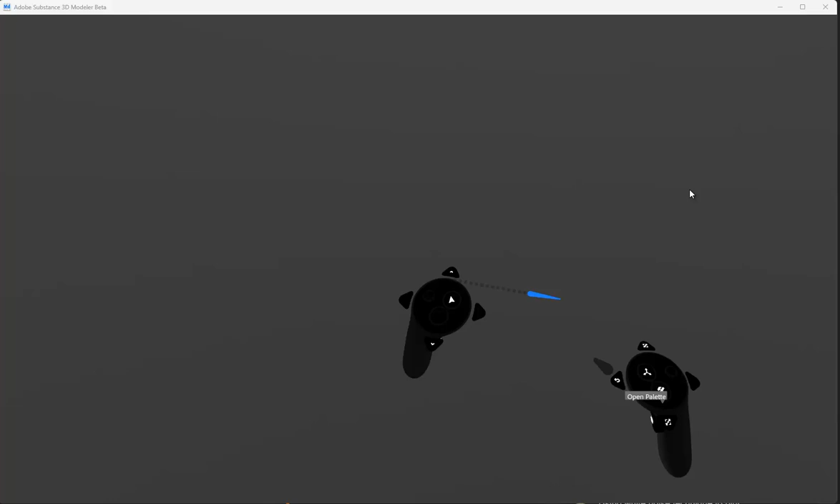So in the last video with the joystick, I went over the very basics. You can watch that to see the basics of how these live blend prims work. So I'm going to start with a cylinder.

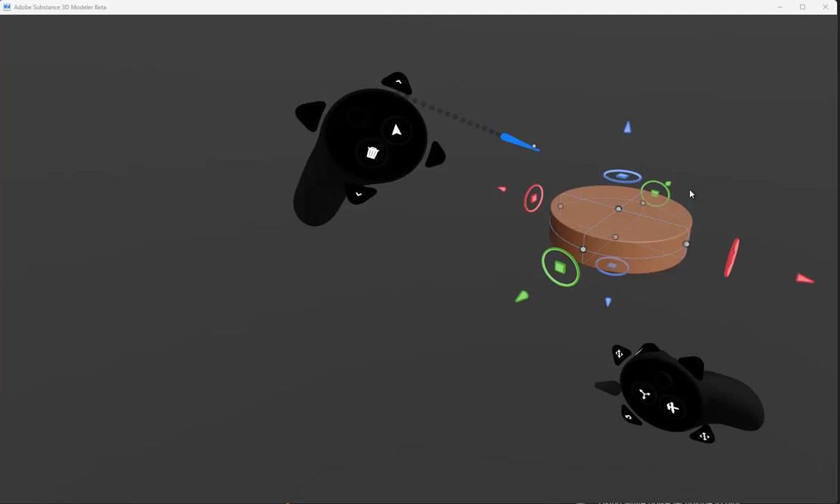Use the gizmo, and these maybe go up a level. These videos, I suppose, are for people that might be familiar with Modeler, but all these SDF tools are the live blend primitives rather than the clay layers. It's fairly new, still in beta, with a lot of features to be added, and there's a few bugs here and there.

So I'll add a bit of a taper, flip that around, and give it a little bit of fillet. As we said in the last video, all of this stuff is fully non-destructive, so you can change the shape and change all these parameters at any time, over the regular clay layers where you lose all ability to change your parameters once you lay down the clay from the preview.

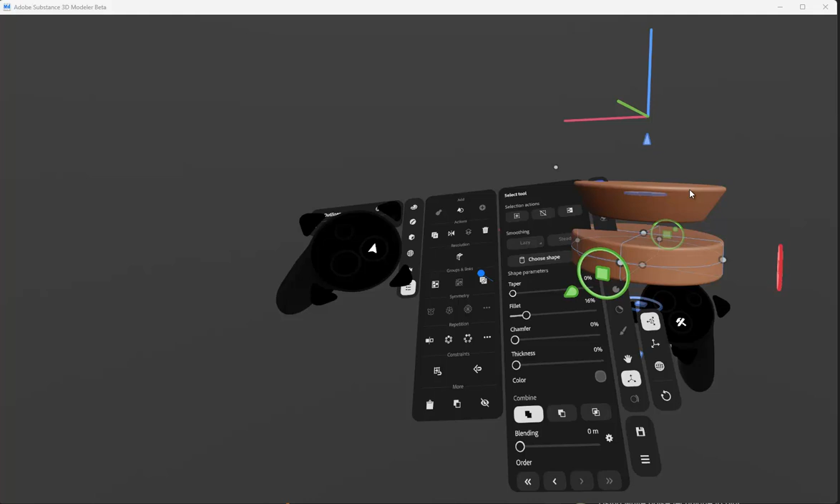So I'm going to just clone that. As I said in the last video, I'm just holding down the secondary trigger and grabbing the gizmo, and that's going to clone. And I'm doing this, cloning it within the same container here, rather than creating another one from here.

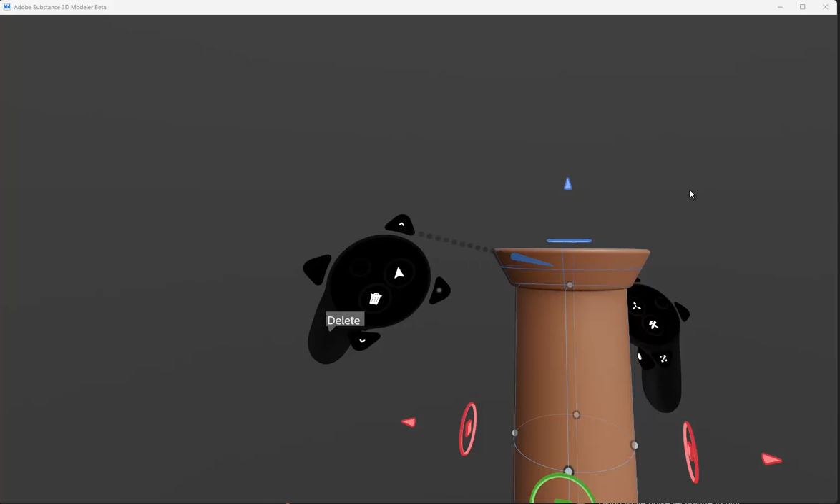If you're working within the same container, you can just keep cloning them, and because it's not destructive, you can change the shape and parameters instead of creating new ones all the time. Just clone it and change your parameters.

So I might add some blend onto that. Maybe a bit more taper, just to give it a curve in, sort of. Maybe a bit more blend. Try and smooth it out there just by moving the top up.

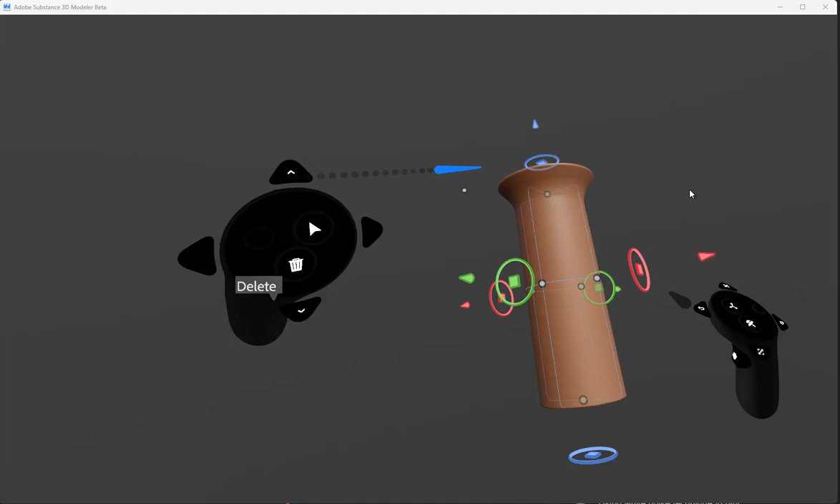And I'm going to clone this again. Actually, no, I'm not going to scale it down, so I'll just clone it and bring this up, add another taper. Maybe stretch it out a bit. Let that blend.

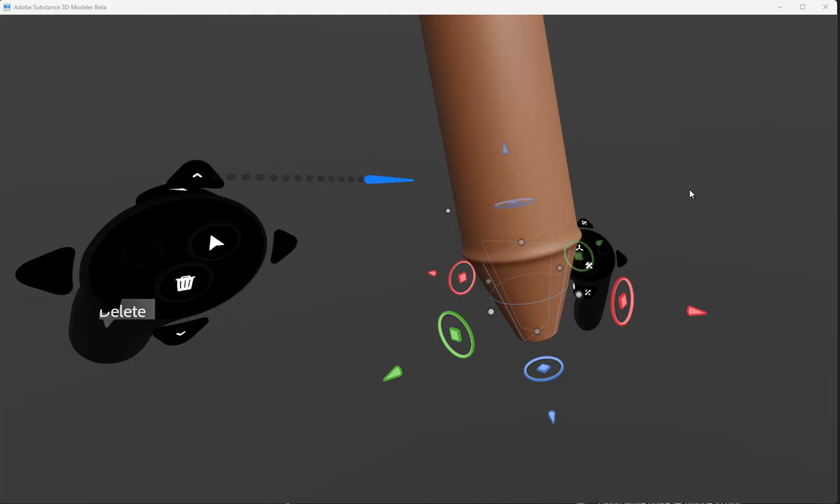And depending on the sort of design you're doing, that might look good there if you want to leave that, or just take the blending down. And then once you convert that across, I think this is an issue with these live blends in all programs that do this kind of live blending with SDFs.

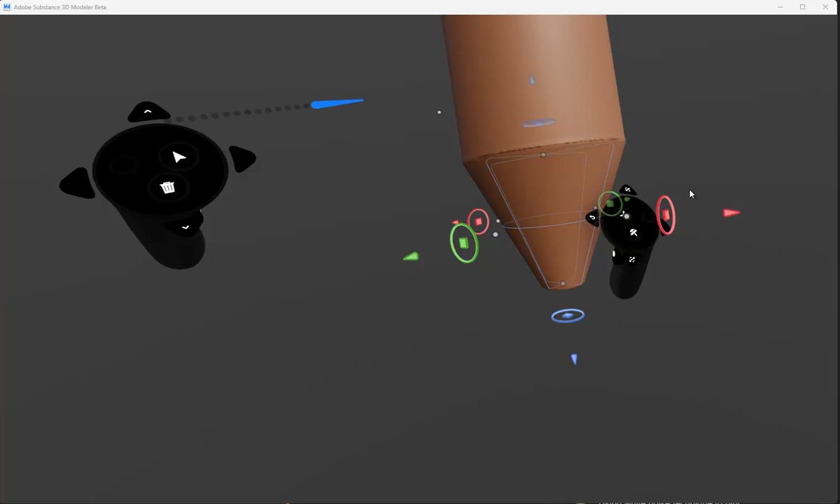When you have two flush surfaces like that, the blend leaves a bulge. It's not just in Modeler, but you can always smooth this out and minimize it. Once you convert that layer to regular clay, it'll all merge together, and then you can smooth it out. So I'll do that again, clone that, and get rid of the taper.

Maybe leave a small bit of a taper on it, a bit more, and take it in. That'll just be the lip, maybe a bit of a taper, yeah. So that's pretty much the basic shape.

I probably actually want to make this bigger, and bring the taper in a bit more, just to get that blend back there. That looks a bit better.

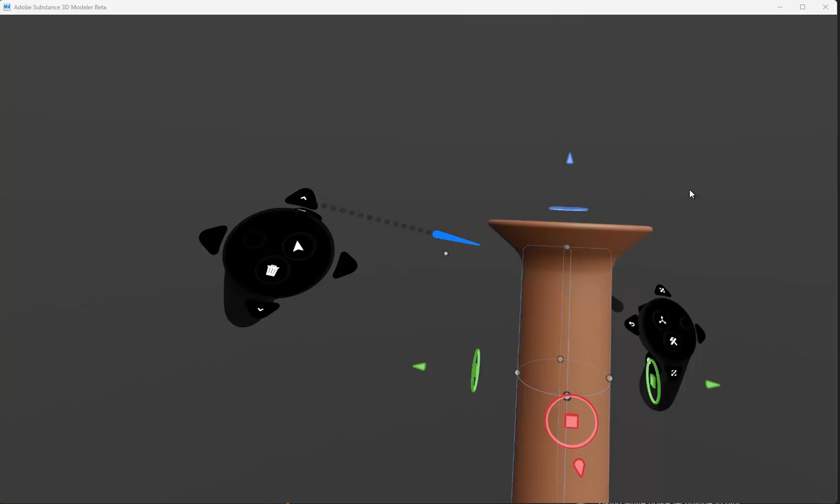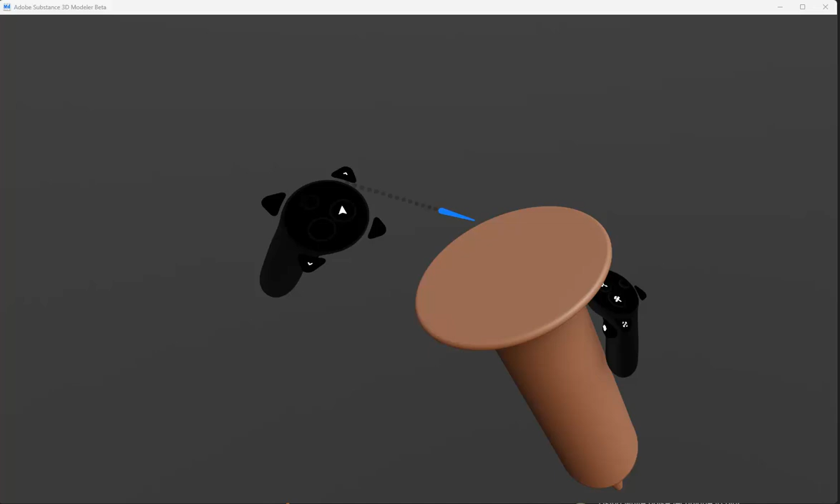So next I'm going to create the inset here for where the screwdriver sits into the top of the screw head, and I'll be using the compound Boolean operand, which means I'm going to be grouping them together within the container. That means it'll be a compound operand, so I can blend them and then subtract from this without the blend affecting this. So if I didn't group them and create a compound and use the blend, you'll see here in a minute.

And then just straight subtracted them as layers within this container that weren't grouped, the blend would affect this as well, which I don't want to happen. So I'm inside this, and I'm just going to create a new layer, or we can do the same thing and turn this into a cube.

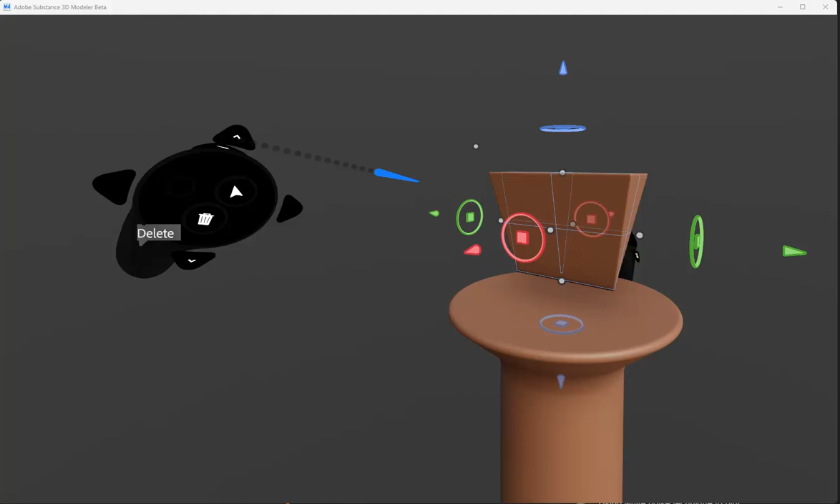And use taper. Let's see how that's going to work. I want to make sure it doesn't - you can see the outline of it here. So I want to make sure - see here, it's coming through the surface. So that means it would leave a hole there.

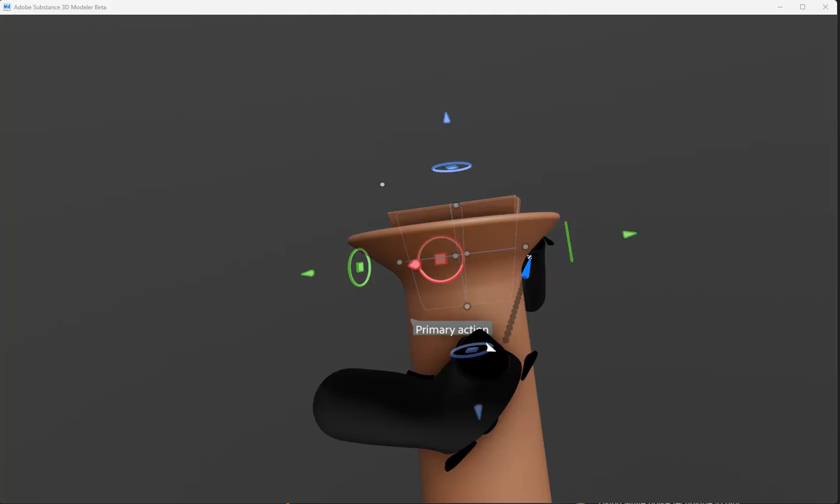So I could make this wider, make this more steep, or just make this narrower here. And if I turn that into a subtract, we can stretch it out there, and then it's hitting it there. So I'll just bring it slightly in, and bring this back up, turn it back into a union for the moment.

And now I'm just going to hold down the trigger and rotate clone, and then press the top button on the secondary controller just to snap that. And now you'll see when I use the blend on this, it's going to give me that curve at the side that I want.

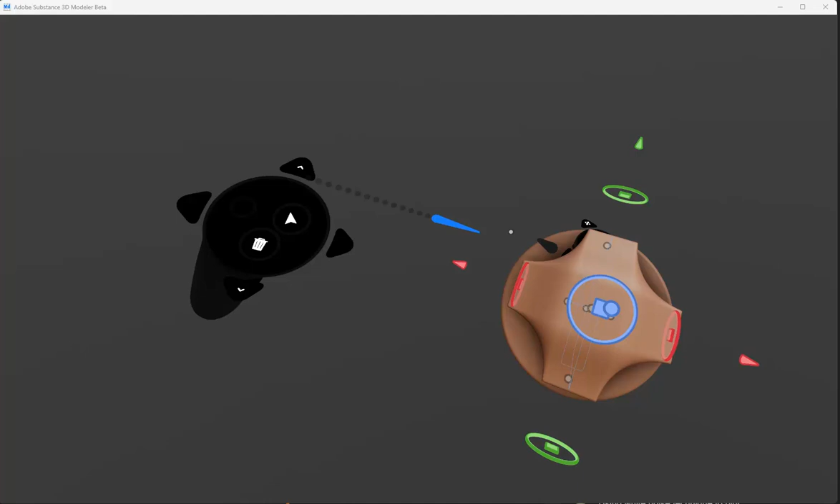Whereas if I did that without grouping these together, it would affect this as well, which I don't want. So I'm going to select the two of them and create that group.

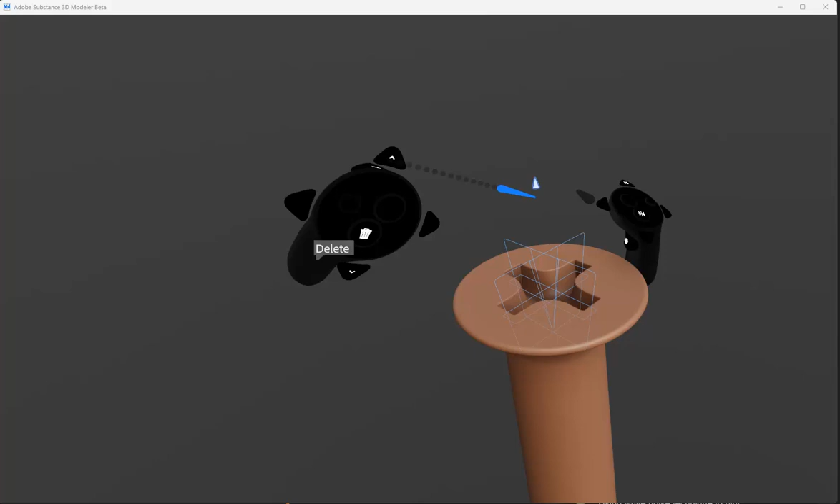And turn it into a subtract. Now we can get that effect without the blend affecting this. One other thing I want to do is make that deeper.

So that wouldn't - if you've ever used a screw with a bad head, the cheap screws with a bad head, this is the type of thing you're going to get. The screwdriver keeps turning in the screw, wearing out the head.

But anyway, I'm going to go back here before I turn this into a group, because at the moment there's a weird bug with the groups that I don't want to run into. So I'm just going to go back before that.

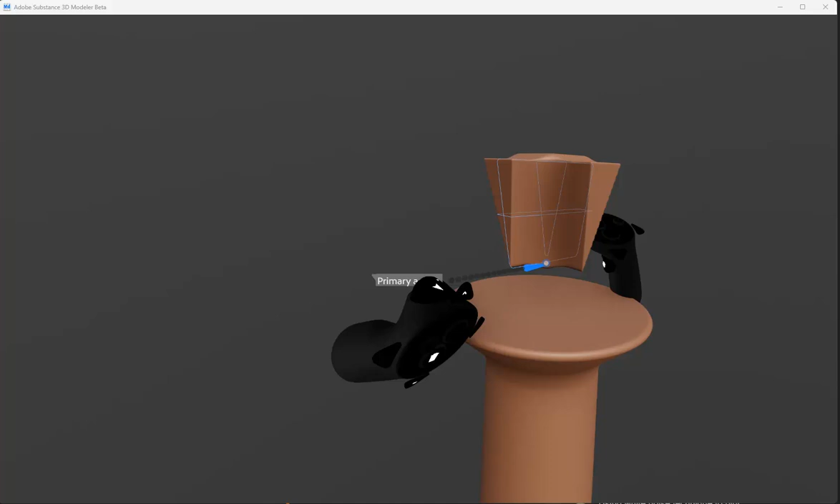And stretch this down, maybe just bring the two of these up, and...

In fact, this is the blending issue I was talking about here, because I haven't grouped these yet. But what I was going to say was, the reason it wasn't going deeper, even though it was into this, was because of the order of operations I mentioned in the last video.

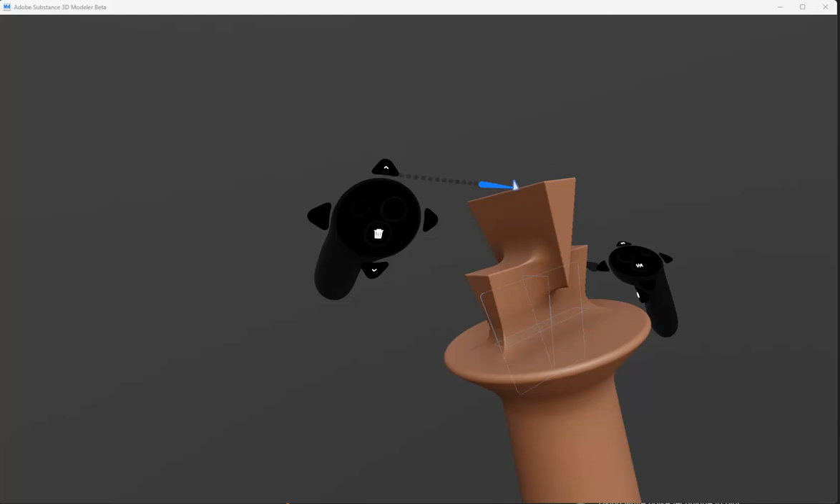So I'm going to go back again. Didn't even need to do that, because that should be enough depth here, goes down into the shaft of it. So what I need to do is take this group, and with the order of operations, I'm going to send it to the top.

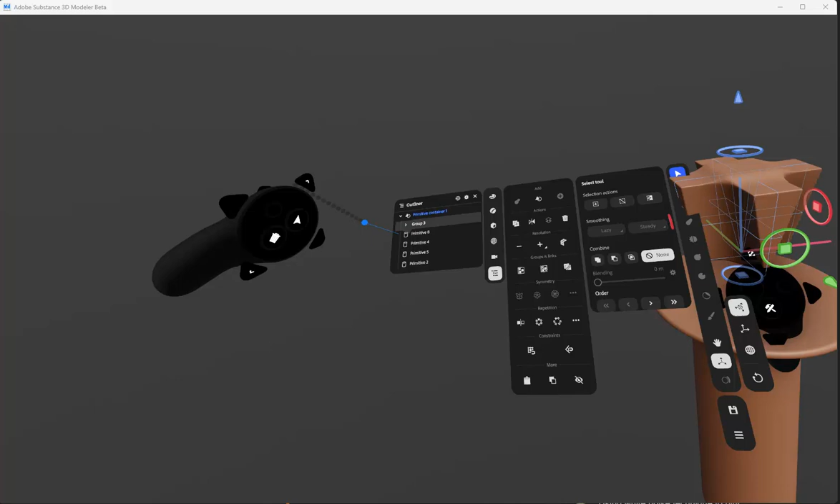So now that it's on the top - sorry, my mistake, I meant the bottom. I want to put it on the very bottom.

I explained the order of operations in the last video, so I can see now that's going down to the shaft a bit more realistically. And then if I wanted to - I'm just barely on the edge there, but I think that'll do anyway.

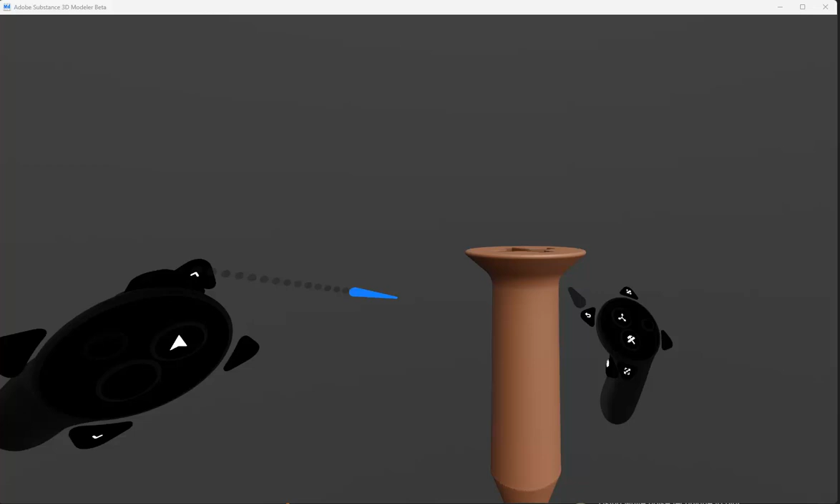And that's how the compound is going to work then, with the group, so that blending effect doesn't happen. So now for the threads - at the moment there's no helix, no parametric helix primitive in Modeler.

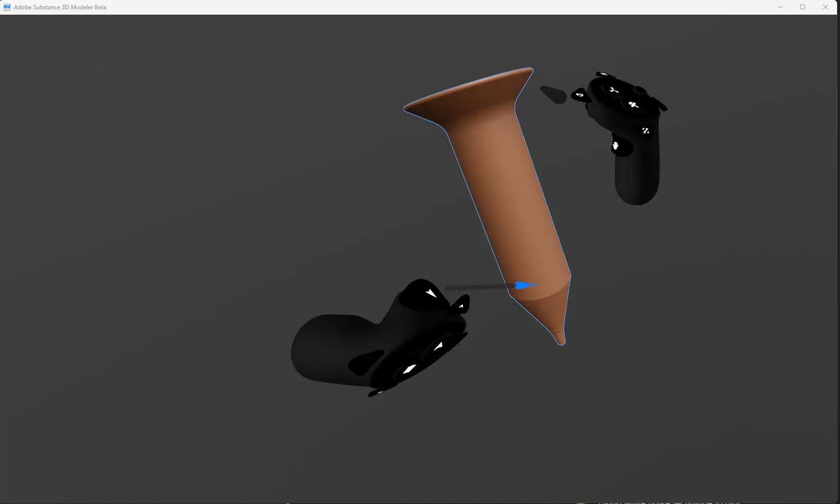So you have to sort of hack this together by hand. This is far from ideal if you're looking to do clean mathematical modeling. I'm going to be hacking this by hand, and I work this way sometimes. It gives you that handmade feel.

And if you're rendering something, it can give you that extra handmade kind of feel when everything's not completely CG perfect. When it's all textured and rendered, it can really add to the realism. But obviously, if you're printing something out, you want it perfect, especially for a screw thread, or for manufacturing.

So the way I'm going to do this, I'll fast forward through it. I'll do it all by hand, but you don't want to watch me do it all by hand. I'll show you what I'm doing, then fast forward through it.

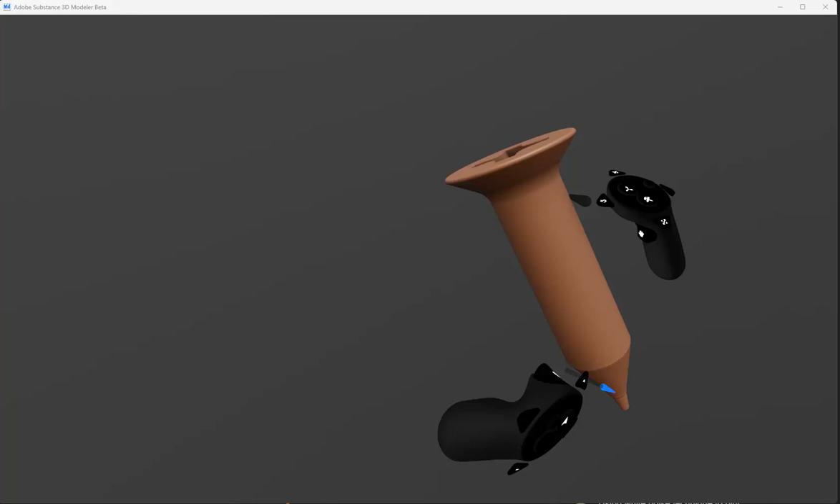Right, so for the thread, I'm going to just use a regular clay here, and this will be your default.

I'll just use the taper, full taper. Take some thickness in, and maybe bring it down a bit. Lay down the clay.

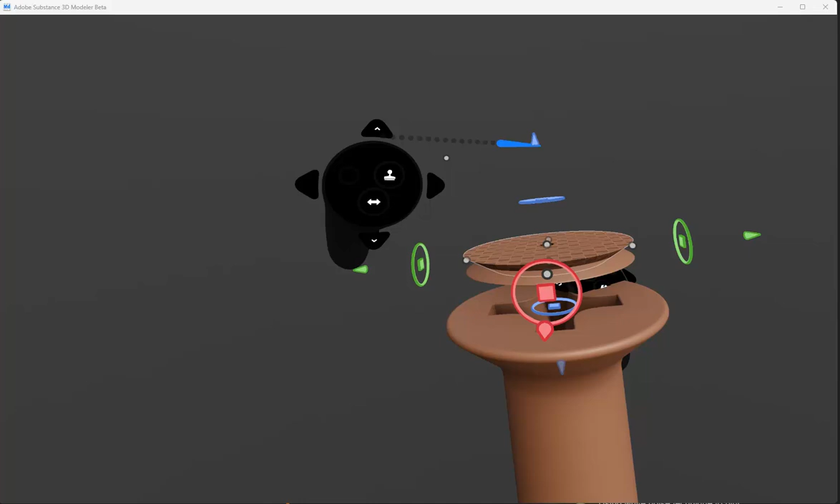And actually, before I do that, I'm going to just put the res up a bit. Lay down the clay, and then just line this up, just to give us that basic sort of thread shape.

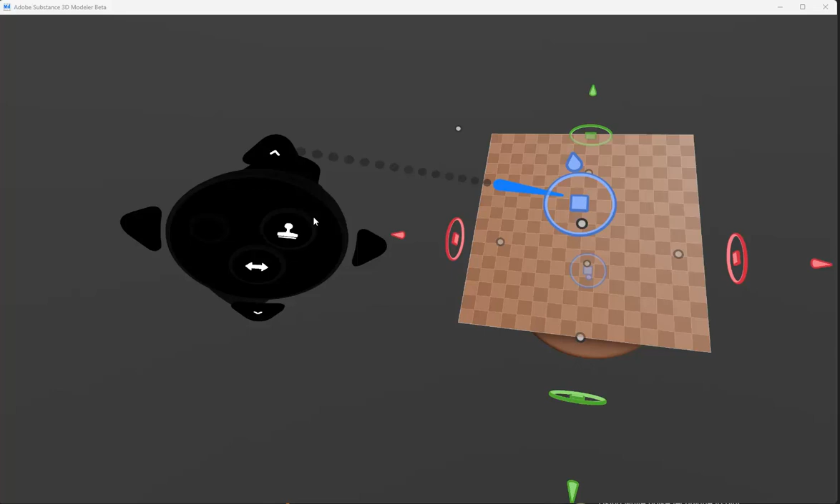Lay that down, and then I'm going to just take a quarter of this, so I can use the - you could use the crop tool here, but I think it's broken in this version, so it would have just deleted all these and left us with a quarter.

So I'll just have to do it the other way here. I'll just get rid of that. Get rid of that. Now this is going to be the section I'll use.

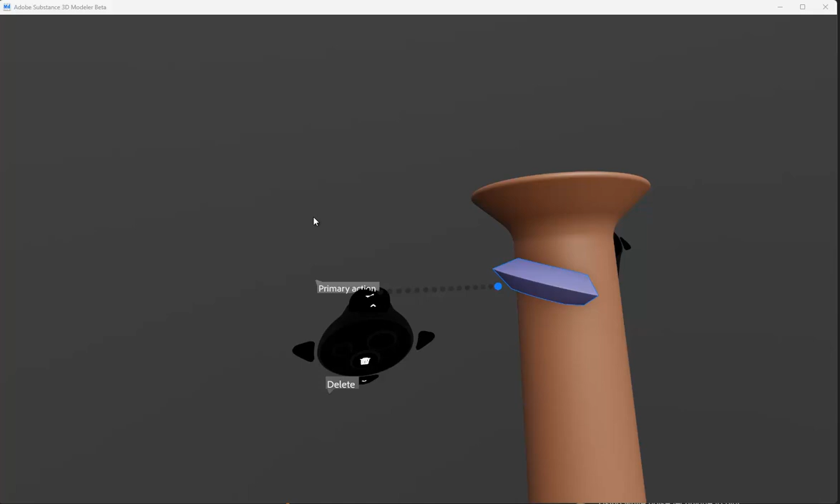Basically I'm just going to go around like this and line this up by hand, which might seem crazy, and it probably is. But as I said, doing handmade stuff like this in Modeler, at least for me, adds to the realism at the very end.

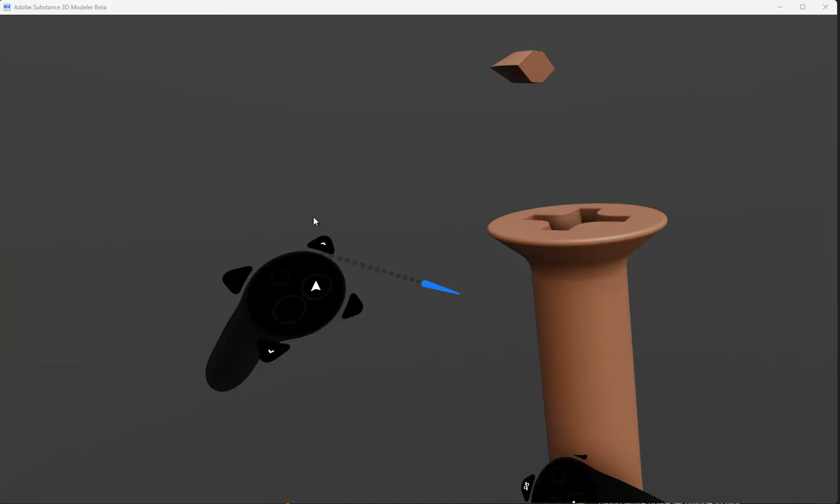When you're rendering to something that's fully textured. So just to help guide with this, because it's going to be very hard to try and get those compound angles on a spiral all the way down by hand and by eye.

So one way you can do that is to just make a guide here, and it is in the stamps. Maybe no, nothing there, and here there is a helix, this mesh spring.

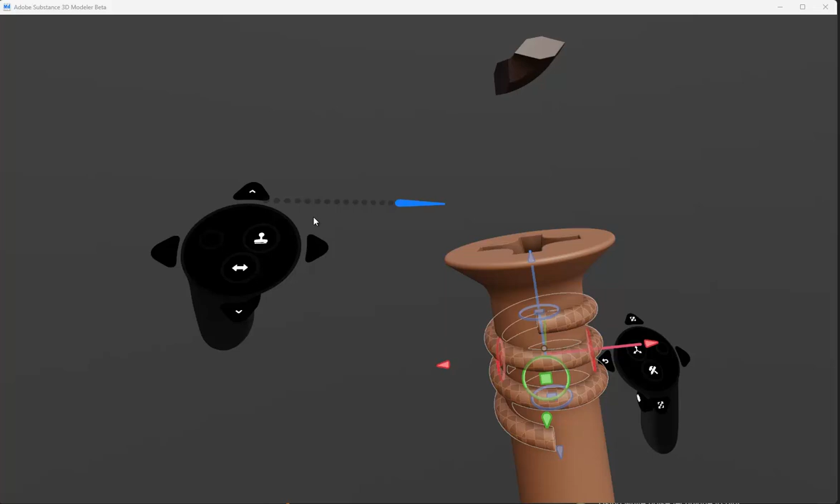Maybe just drop down the res, and maybe about that size. Now obviously, this isn't parametric, so you just have to go with what it is here. I'm just using this to show you the kind of method you can use. So lay that down.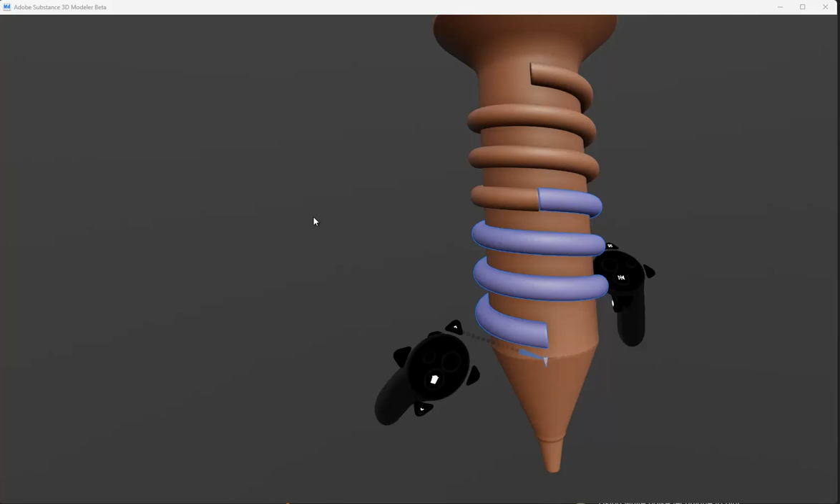Not just for this example, but for making stuff by hand in general, it's good to get used to the method I'm going to show, because you can use it for all sorts of stuff. Then just do it manually—it honestly doesn't take long to do this sort of stuff in Modeler.

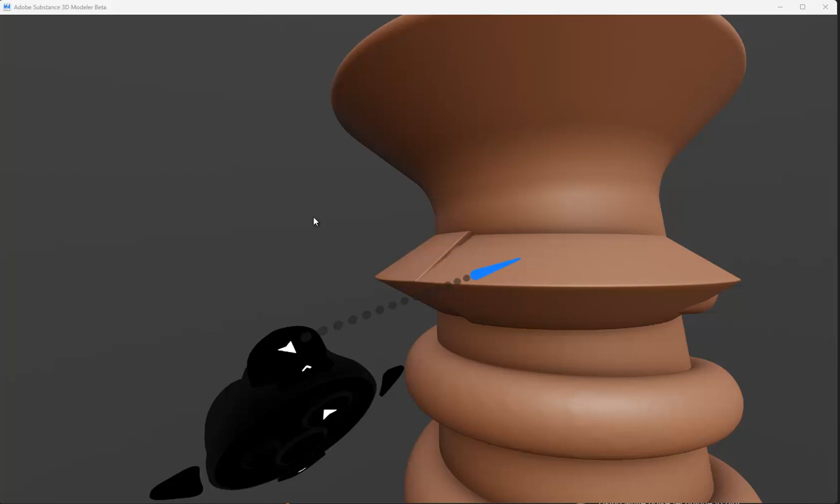You just have to sort of zone out. You can go as fast or as slow as you want with this, and depending on how long you spend, you're going to get better or worse results. So you kind of just have to roughly line them up. This is all compound angle sort of stuff on a spiral, trying to match up loads of angles, so it's going to be very hard to do perfect by eye and by hand.

I like to just get them roughly in place, and then with a largish warp tool—you can also use the gizmo and try to do it like that, but for me that'll take even longer. So I just do it like this, and then I'll show you how to do it with the warp tool.

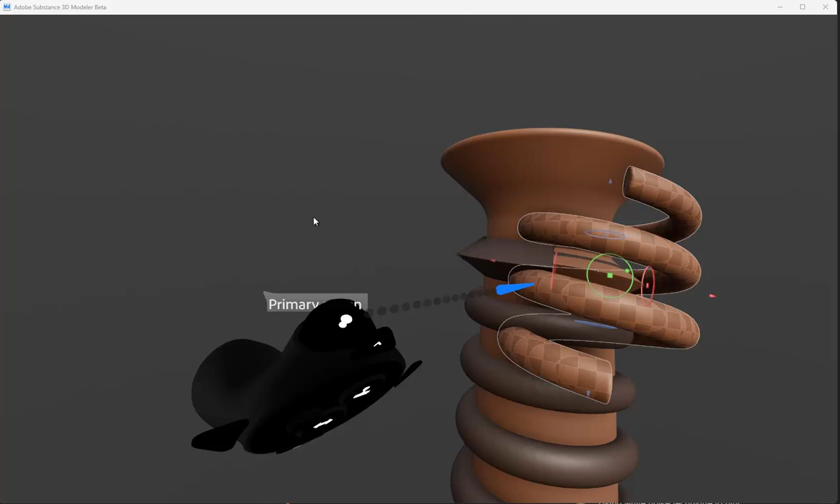You don't have to go all the way down with this. You can just get a few of the sections lined up to where it comes around—that's one revolution. Then you go in here with the warp tool and just sort of line it up a bit like that.

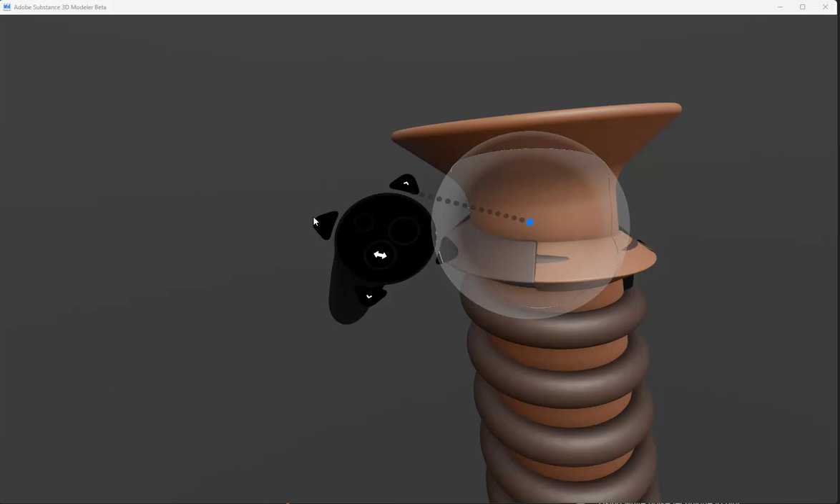The better you line this up, the neater it is when you merge these together. It's going to be neater here, and you won't have to do as much smoothing.

I'm not going to do all of this in this video, I'm just going to show you how to set them up, and then you just go in and do it manually. I'll speed it up so you don't have to watch that, but you can just eyeball it here.

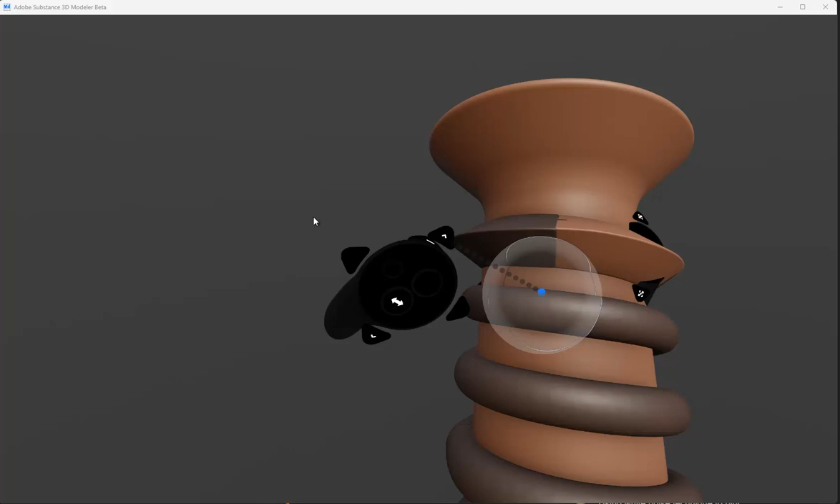But really, I don't mind doing this sort of stuff in VR. You kind of just zone out, and it can be enjoyable because you're doing it by hand—like you're doing something like that in real life. I like to work with my hands in real life, doing woodwork and whatever kind of construction or building work. So I actually enjoy this.

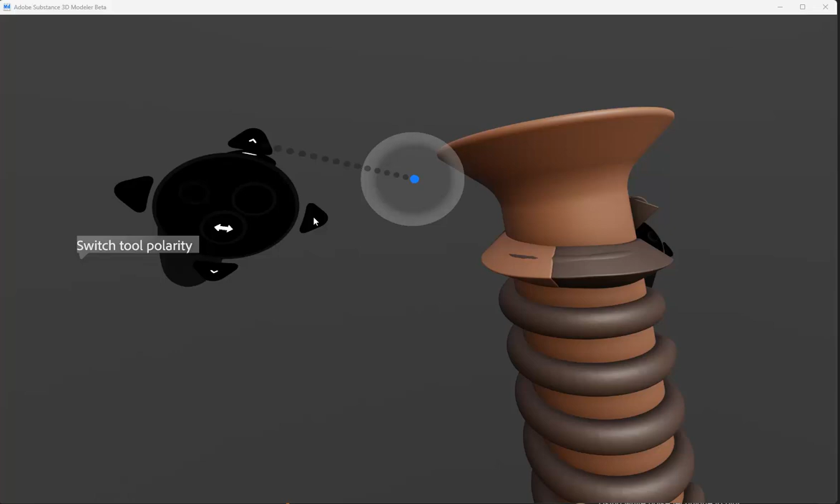So let's say that's a revolution, and then you can just select these, use the gizmo—I'm cloning there with the trigger, and then while still holding down the primary trigger, cloning with the secondary trigger, holding down the primary trigger, and then secondary thumbstick. That's going to give me that array, so you can make as many of these as you like, or as few as you like. I'm probably going to just leave it—maybe that's good enough for the example.

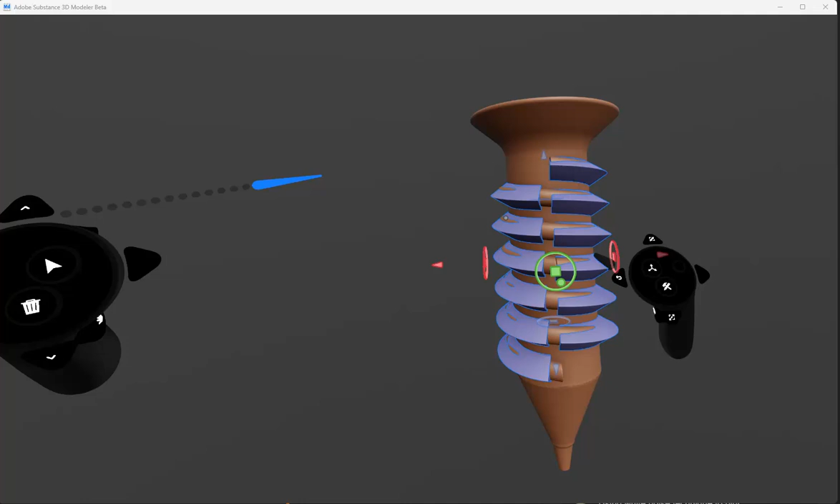These are all separate layers, obviously, so I'm just going to get rid of that there. I don't need them anymore—they were just a guide.

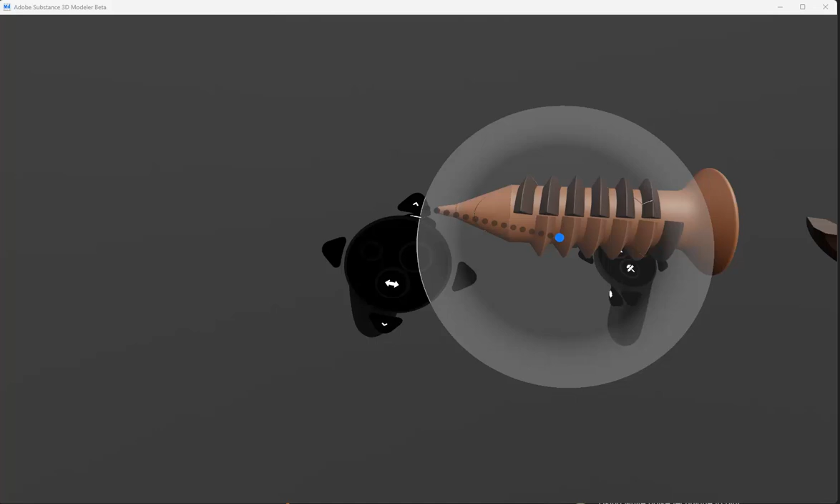What you could do here is select all these just to keep them parallel, so you can use a large warp brush and just do it nice and easy. Because all the layers are selected, you can keep these gaps, and then just do the same for this. Leave that one there, select the warp—quite large—so you don't leave any gaps, and then you can just go in one by one.

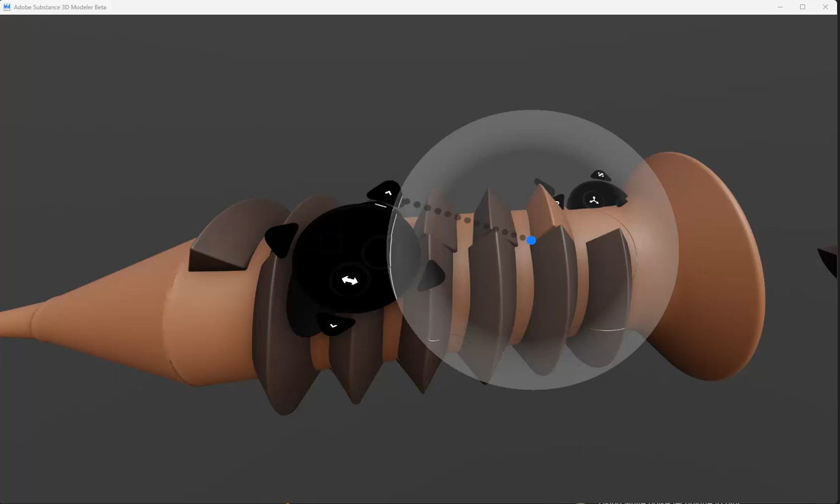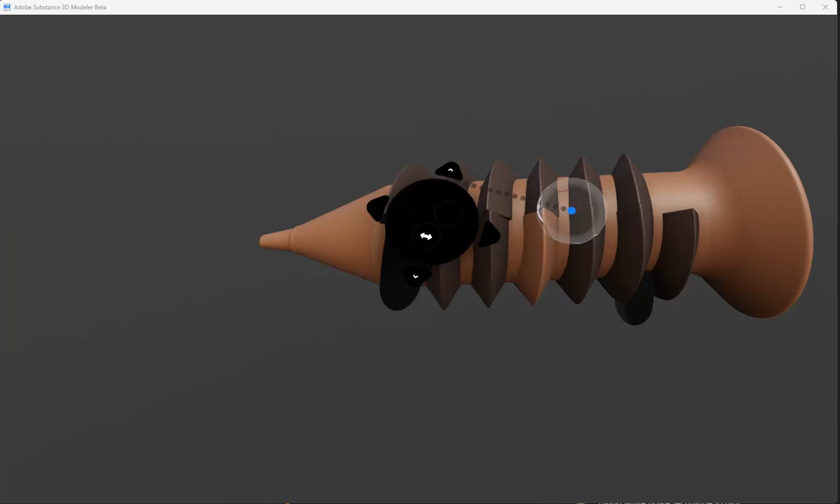As I said, this might seem a bit crazy to do, but it really isn't—it's so fast once you get used to working in Modeler. For me anyway, it's enjoyable. If you had to do this in a traditional 3D program, you'd have all the tools to do it with, spirals and all, but doing something like this manually on the desktop would be a pain in the ass. It's actually quite enjoyable. I was supposed to just fast forward through this, but it's going pretty quickly, so might as well just keep going.

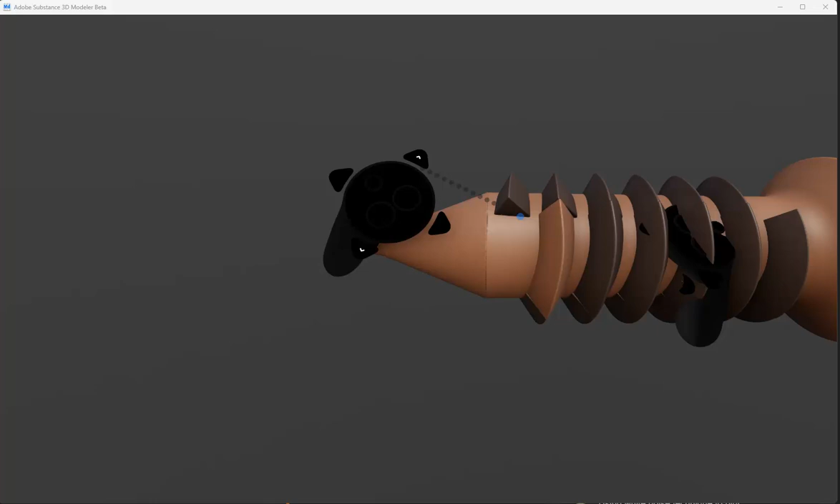As I said earlier, the more time you take, obviously it's going to be a bit neater. When we go to merge these, you can see that's pretty good there - you can really overlap it in. The closer you get these on the joints, particularly here, the less smoothing you're going to have to do, because the smoothing is obviously going to soften out the sharpness when you reach the edge.

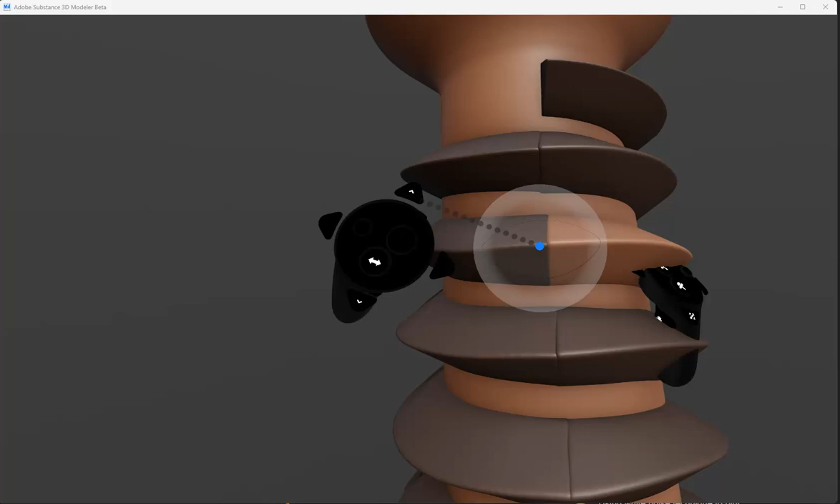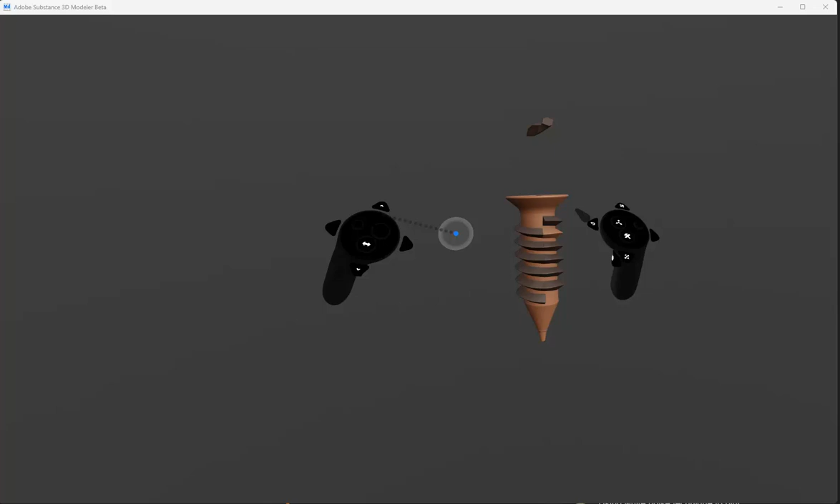I'll probably just speed this up. See there, the way you want to, if I select the two of these together, just try to even that up a bit. You do this stuff by hand, by eye - you can kind of eyeball this up. But these ones on the end, you can just finesse them down as they would be on a real screw. Same for the top one there.

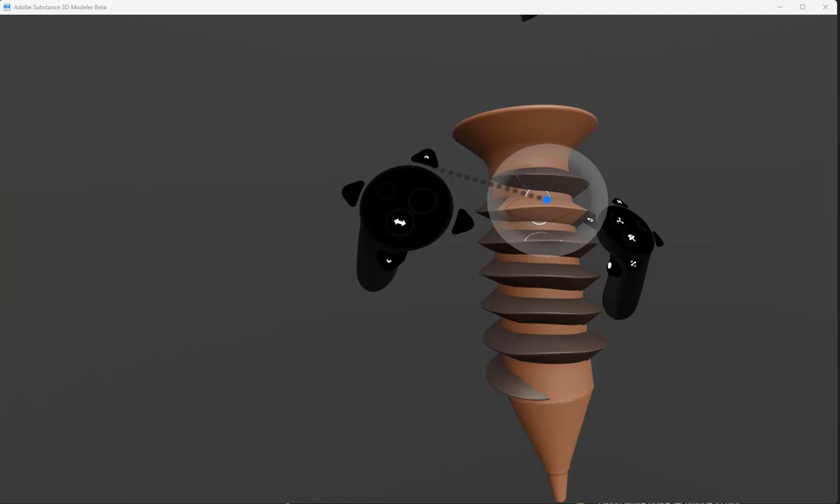I usually work - you can see here they've got the warp tool. I usually work at a lower strength; I never work at 100% strength on the warp tool. It doesn't look too bad for something that's done manually. There's still some weirdness here, but you can just, as I say, do all that by eye.

It's going to be more accurate if you take more time to do it. Also remember, too many people, especially when starting out, are so worried about getting perfect quad topology, making their wireframes look perfect and all that sort of stuff. We're all like that when we start off. But as you get more into 3D, you realize that a lot of the time, in a lot of cases, you don't need all that.

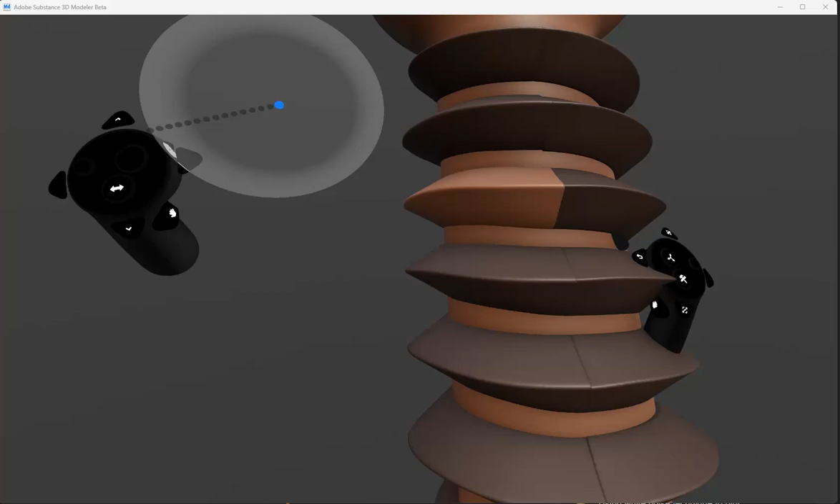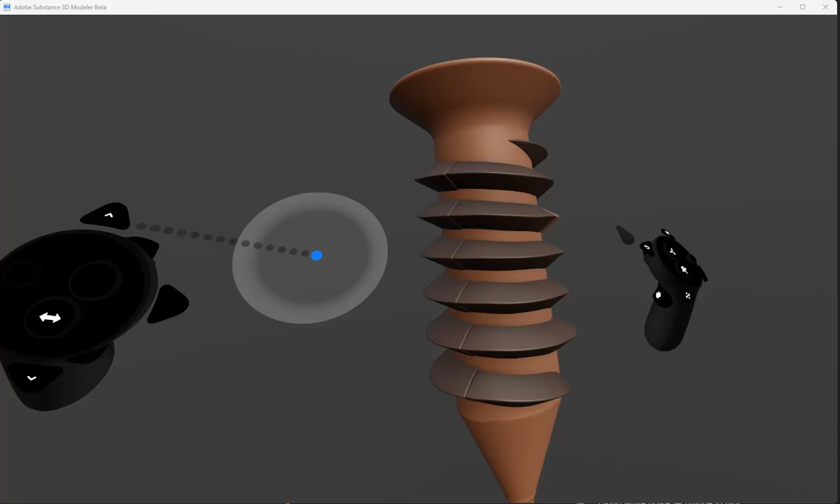A lot of the time, when you're just doing renders, if everything's perfect, CG perfect, it's just missing that something. If this is a screw that's been in your father's toolbox out in the shed for 20 years, you don't think it's going to be absolutely mathematically perfect. No, it's going to have dings and bangs, and if it was used a couple of times, put in and out and thrown in the box, it's not going to be perfect.

And it definitely adds to it - if you're trying to do photorealistic rendering with good texture and shading, especially with modern renderers, it's just going to look more realistic. Take my word for that.

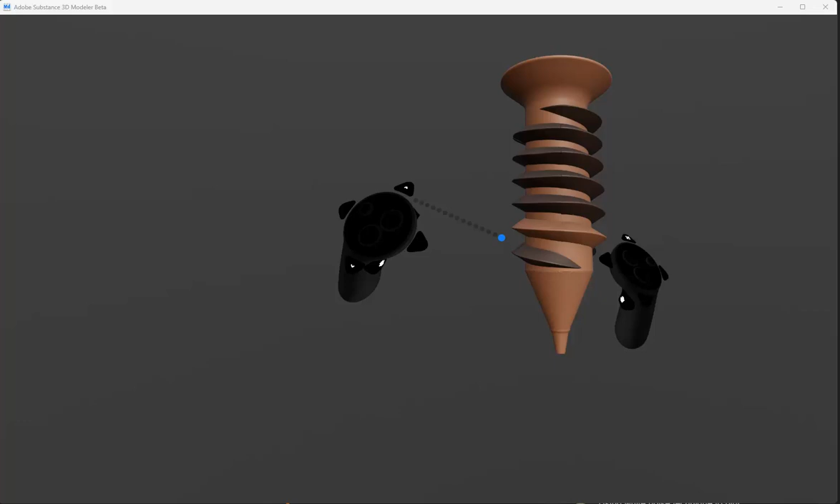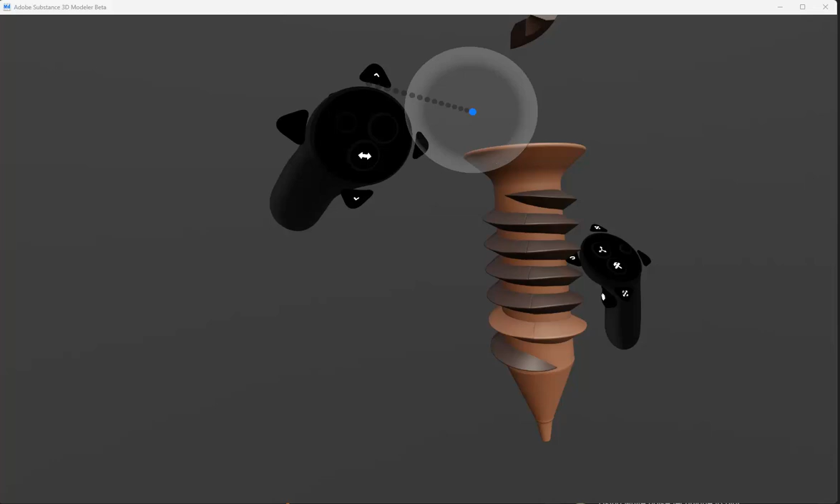So I'm not going to keep this - this is all wonky here, so I would fix that. I don't want it to be too wonky that it couldn't actually be used. So I might just lessen that out a bit, maybe push it in here - it's not too bad for something done manually. I'm going to leave it and fast forward through it, then merge it with this, convert this to clay, merge it, and then smooth it.

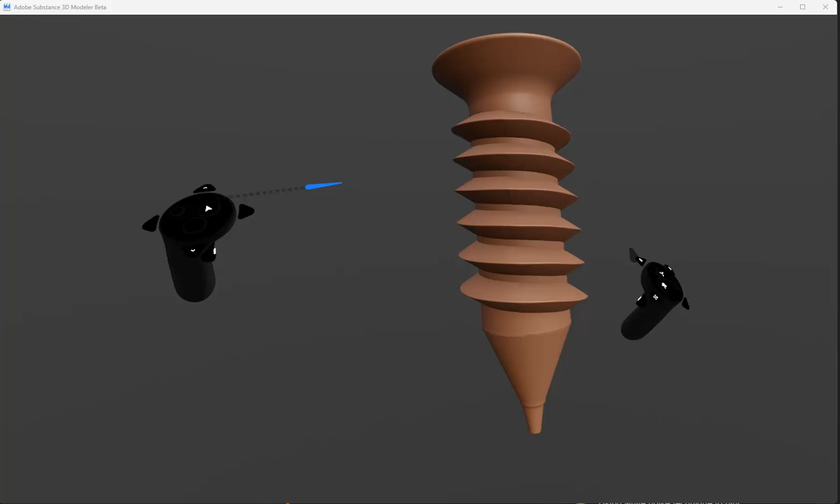Right, so let's say now you have all this perfect, I'm going to leave it at that. Just make sure that - I meant to mention this earlier - these corners here, the very peaks, just make sure they're decently lined up, because it'll save you having to put too much smoothing across there, which otherwise gets you dents here.

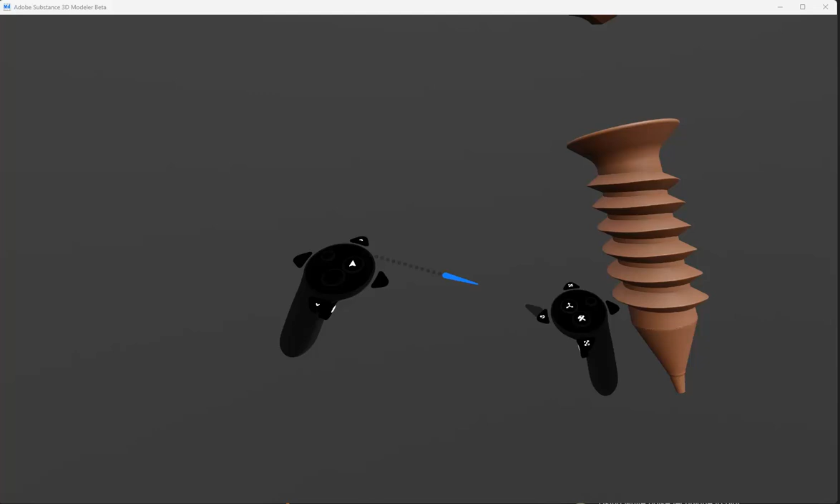So I'm going to just select all of these, deselect this, maybe go up another level, then I'm going to smooth these once they're merged together. You can see here now, the better they are lined up, obviously the less smoothing you're going to have to do here.

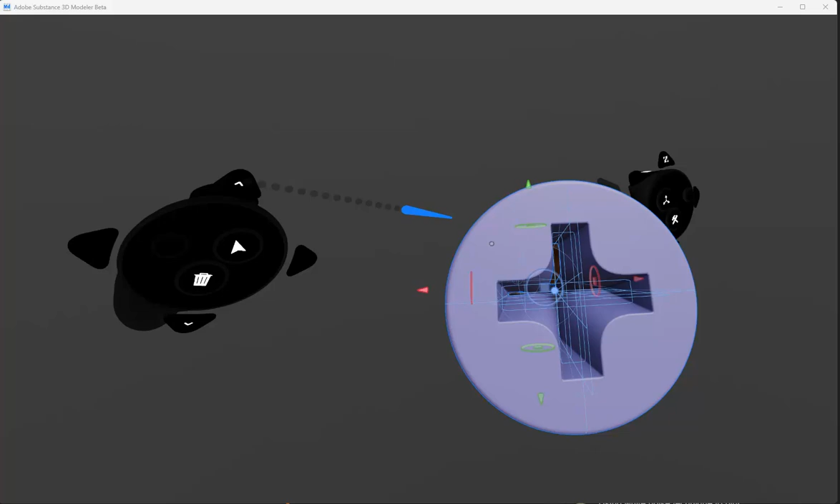So let's say we're happy with this - can delete that, we're happy with this. This is all still non-destructive. So let's say we're happy with that, and now we want to convert that to clay so we can merge it back to the thread and blend all that in. I'm just going to go here to convert to clay, and now that is a regular clay layer. Then we will merge this - maybe just step that up a level and merge it back with this.

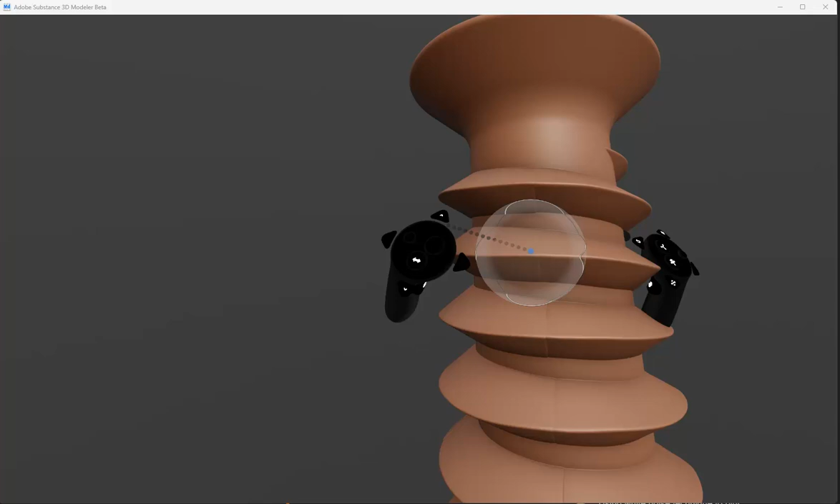Yeah, and now you see the way I still have some wobbly bits here and there, but this is obviously a lot easier to adjust when it's all separate layers. But I'm not going to worry about that because, as I say, I don't want it to be perfect anyway. And if I did want it to be a bit more perfect, I'd just spend more time on it.

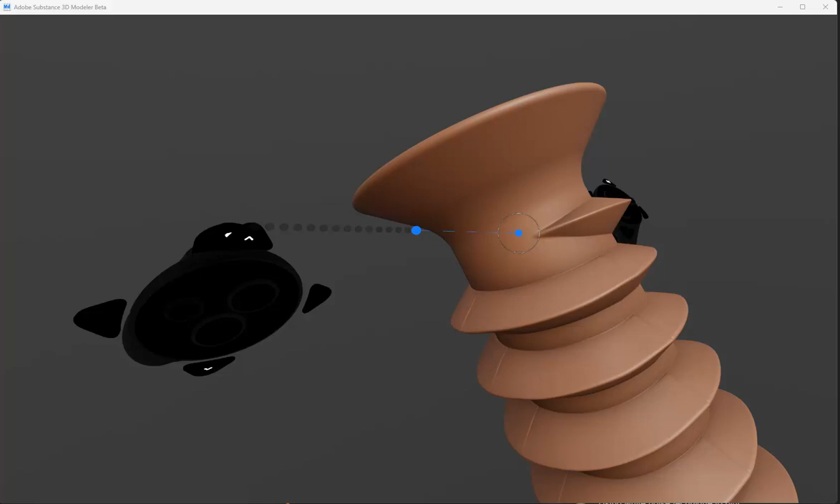But to me, that's fine there for what it is. So basically now it's just a matter of going around and blending this back, smoothing it in. And see here on these corners, as you mentioned, you want to try and maintain them. They'll probably just maybe, yeah, the properties, maybe give it a bit more spec.

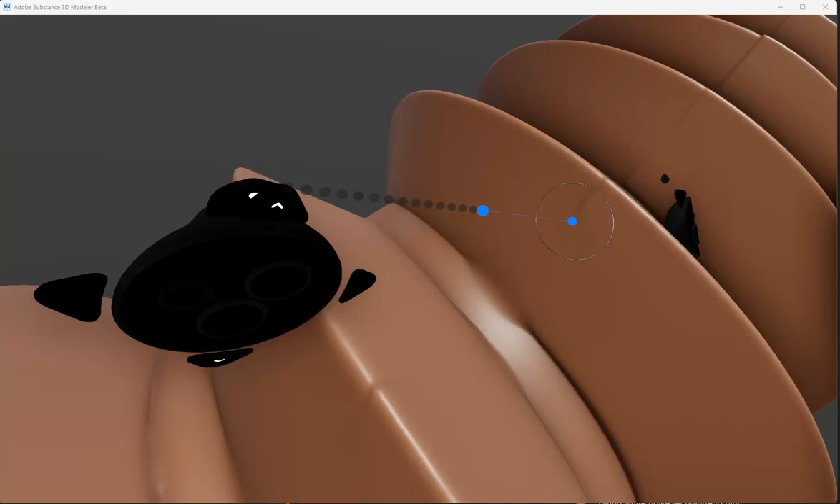So basically I'm just going to be going around, going nice and easy there. And same again, I'm going to fast forward through this because that's all I'm going to be doing, is just going over all these exactly the same on each one.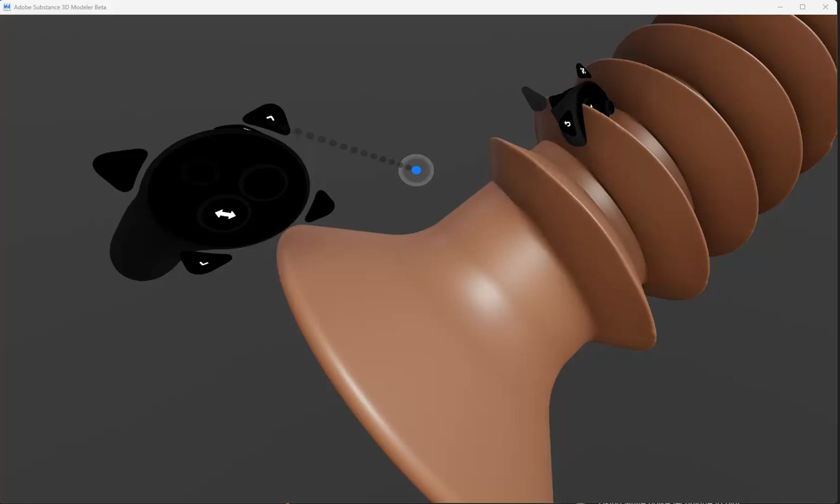Right, so all those joints are done, and then it's just a matter of going around the threads here. And it's up to you. If you add more res, you're going to get a sharper join there when you smooth. And then obviously you can change the strength of your smooth tool.

So that's kind of just purely subjective. Do you want the joints there to be sharper or more blended? Depending on what you're doing.

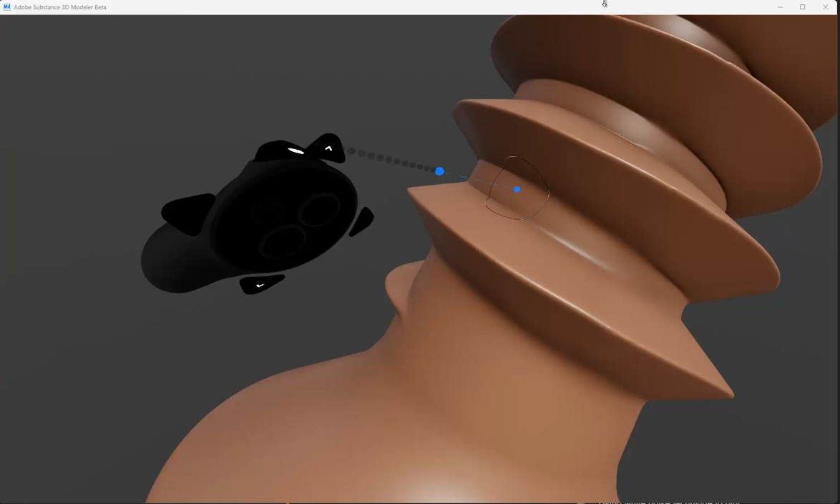So I'll just make this big enough to catch the two of these together, so you don't have to go over it twice. And just follow the thread around. Now you can see what I was saying here, the way that one there.

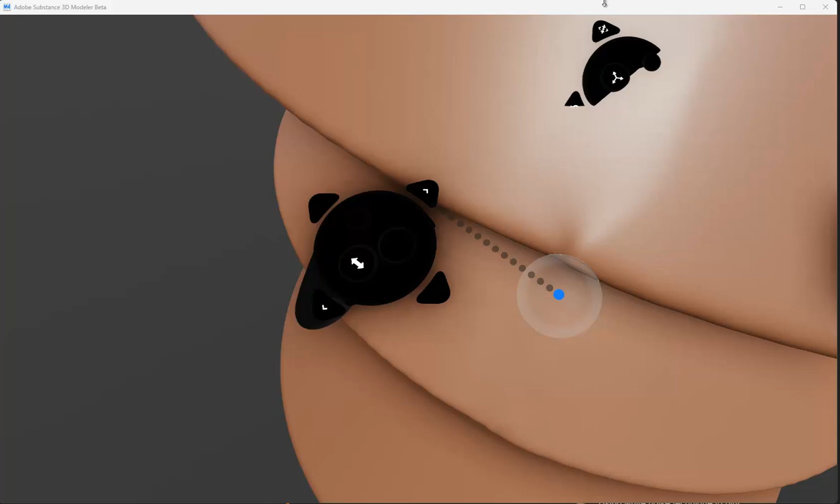So that's, yeah, it's up to you, whatever way you want to do that, how perfect you want to make it, how much time you want to spend on it. But I'm just going to leave it and keep going around this. I'm going to go all the way to the end, so I'm just going to fast forward this part of the video again.

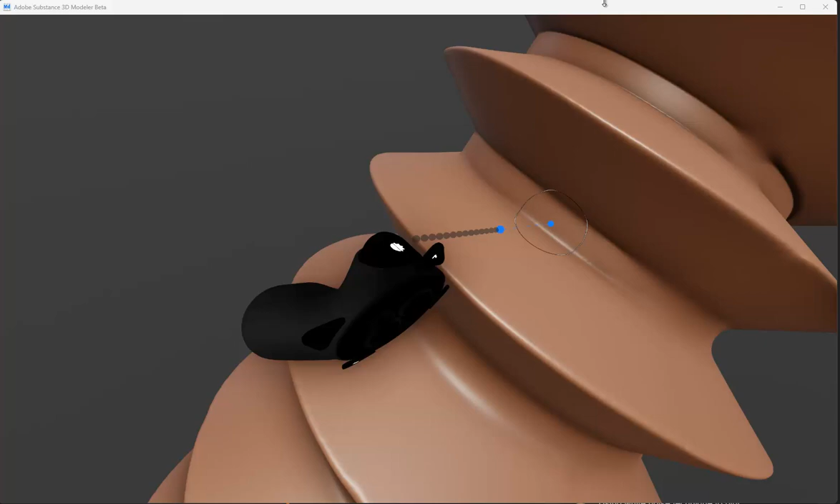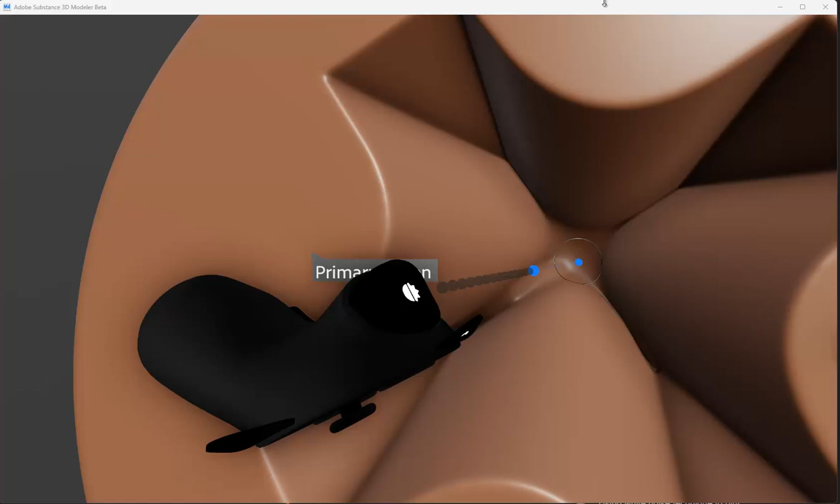Alright, so that's pretty much that. And you could have put more bevel here, chamfer. You could do all that in the stage before converting this, but as I said, now it's converted, so you don't have any access to any of those parameters. But you can always go in here and smooth it if you want, if it's too sharp. Same for anything here.

That's the beauty of having both methods of SDF creation tools, that we have the best of both worlds. There's no other voxel program that has that: sculpting tools, smooth warp, and the live blend prims.

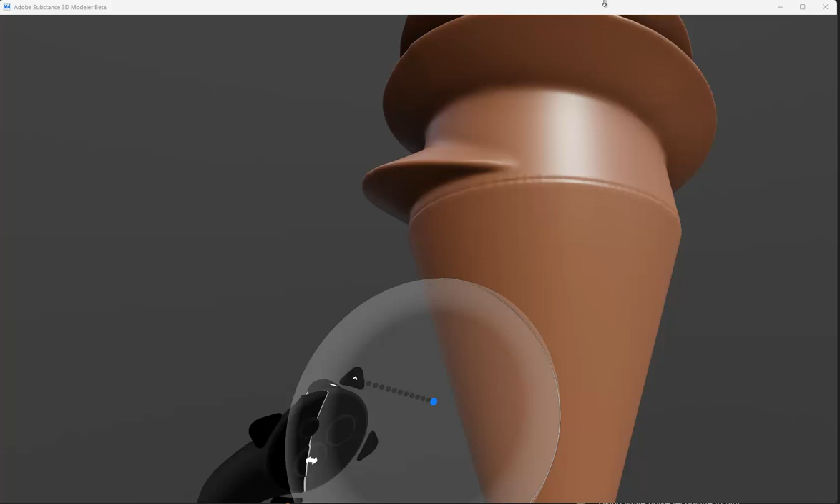So the likes of these here, these little leftovers from the blends, you can do whatever you like with them there. Personally, I'd leave them there because it's going to add to the realism when you render. Because if a screw is made, it's going to have artifacts like this left over on it from the manufacturing process. So I would leave them in.

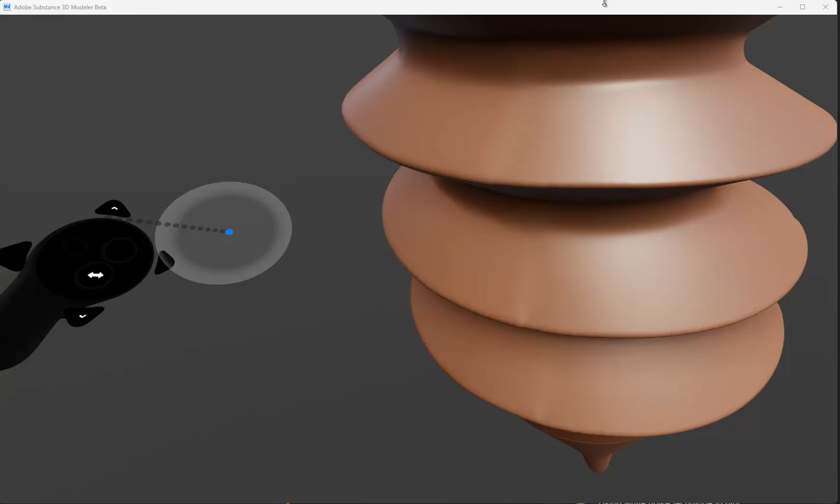And you can see here now, because I have more spec on this, you can still see where this surface was smoothed together. You can try and average it out as best you can, or leave the artifacts on it. But personally, I don't mind. It's when this is textured...

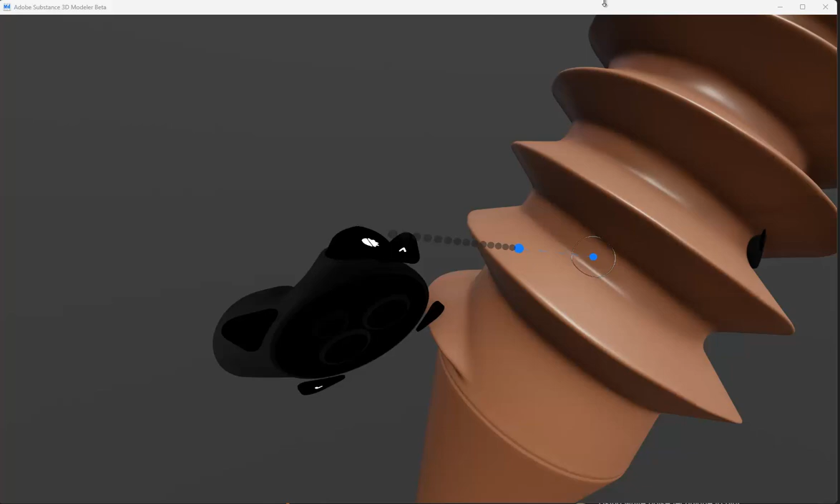That's the thing as well about this, people obsessed with these perfect models. When it's textured as well, you're not going to see it. Now it depends what you're doing. I'm not saying model sloppily all the time, I'm just saying it depends. It's always going to depend on what you're doing.

Like if you're building something for somebody, a client or something, that has to have perfect topology, or it's going down the pipeline, people are going to be unwrapping it or rigging it or whatever they're going to be doing, and they expect clean topology, well then obviously you have to do that. But if you're just doing projects for yourself, you can decimate something and texture it with auto UVs or whatever. You can do whatever you like really. So it's obviously a case by case basis.

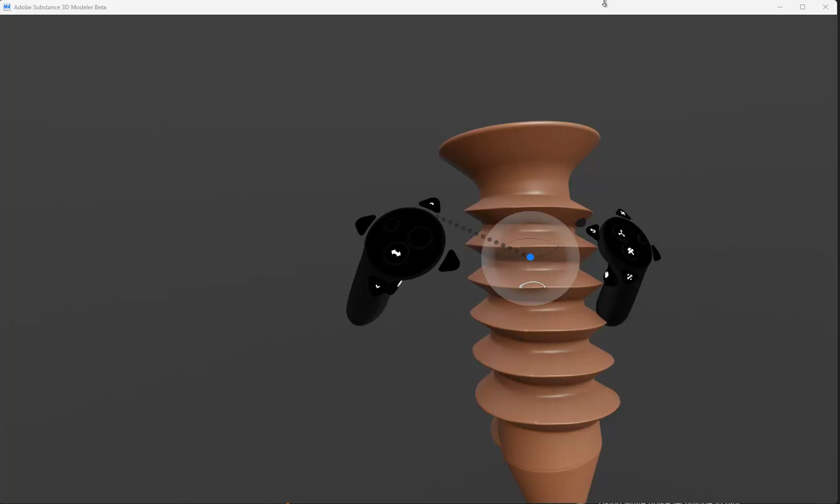But yeah, I'm going to leave this now, and that'll do the job. It's not too bad really for doing it by hand.

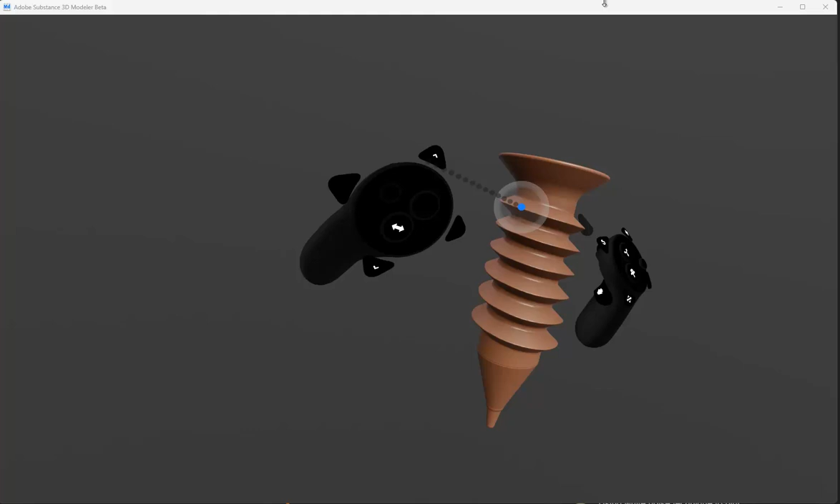And as I said, the purpose isn't, oh look, we have to be able to create a screw thread, the purpose is to show you a very useful technique of modeling, and that's hand making something like this from loads of different parts and then merging them together and blending them in.

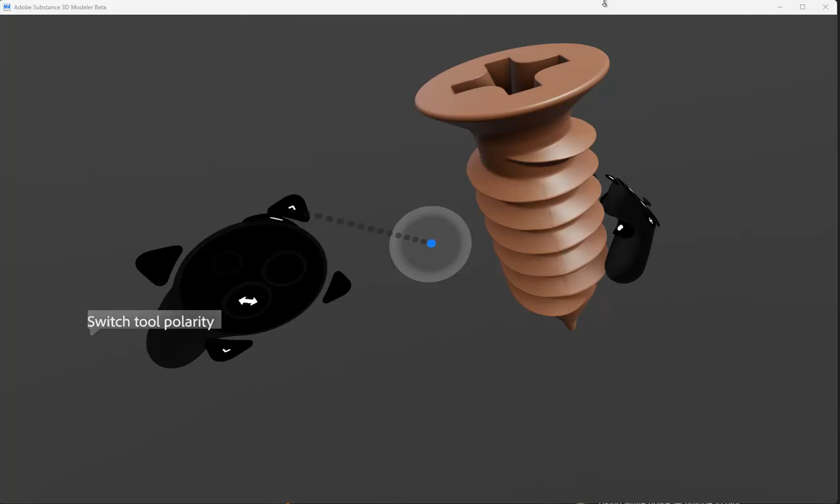And I used that extensively on a project I recently did. It was a 24-inch, or 1:6 scale, or 1:4 scale I think it was, a big 3D printed warrior angel character, and I used that technique on her for most of all the ornamental parts that made up all the armor and everything. I made them all in small sections so I could get all intricate sort of curves in the designs, and then I just blended them together, merged them and blended them.